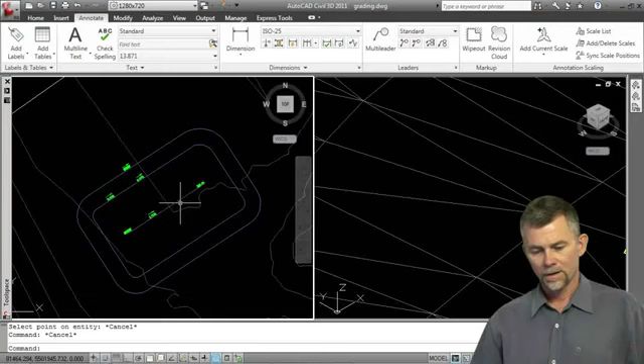We're now going to move into an example where we create grading objects for a pond, and we'll create the pond interior, the pond berm, and the pond daylighting. So if we come back to here, I'm going to actually start from scratch. I want to start with something clean here so we can work with.

Let's create a rectangle first, and I'll turn my ortho off. We'll create that rectangle. Let's say that's a little too big. Let's just create it about that big. Let's rotate it around the middle here, and there's my pond bottom. And what we're going to do now is convert that into a feature line.

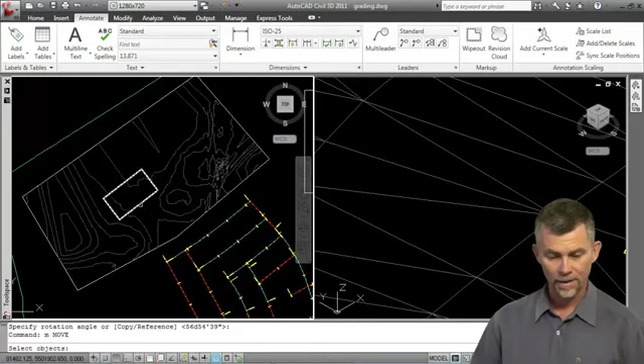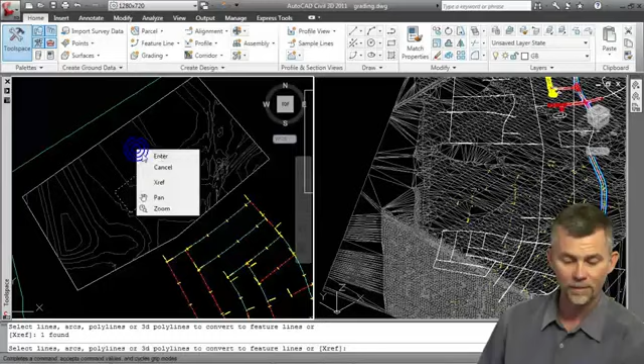So on the home tab of the ribbon, oops, I think I created a new drawing by accident, didn't mean to do that. On the home tab of the ribbon, we will create a feature line from that. So feature line, create feature line from objects. There's the pond bottom, and let's call this pond bottom. It's going into the pond site. I'll use the grading feature line style.

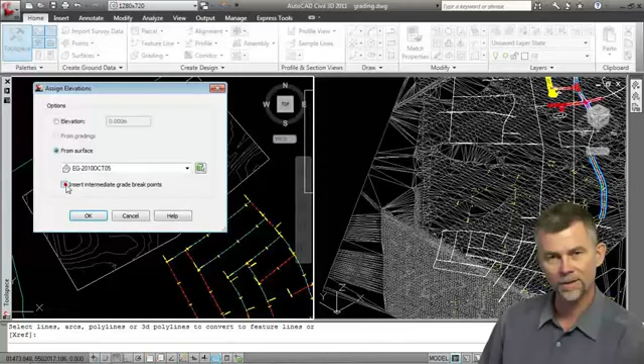We will erase existing entities, and I am going to assign elevations because I want to get an idea of the lay of the land underneath where my proposed pond is going to be located. And where are we getting the elevations from? The surface, and I am not going to add intermediate grade breakpoints because I just want the elevations at the vertices. And there's our pond bottom.

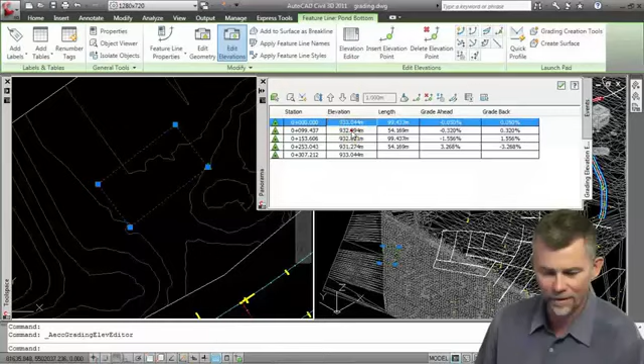So now let's edit those elevations to get something that's realistic here. So we'll use the elevation editor. Now I'm going to look at these and say, well, for each vertex I've got 933. Let's unselect it here. 932, 932, 931. Maybe I want my lowest elevation to be 929.5. So let's do that. Let's set this to 929.5.

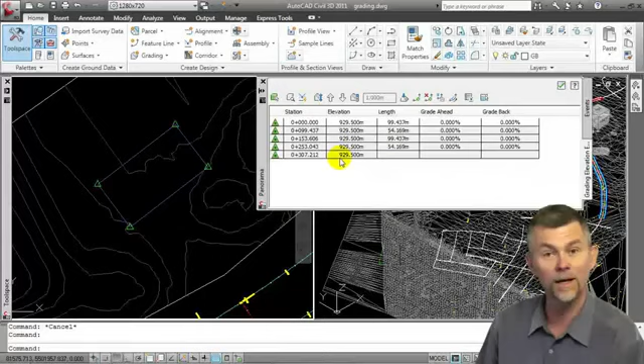Oh, I just did the first one, sorry. Let's pick them all and use this button here, and we'll go 929.5. Okay, so now we have, once again I'll use the flatten command, and now we have an elevation of 929.5. So that's the pond bottom. So before we grade the pond interior, let's do a little fillet on the corners.

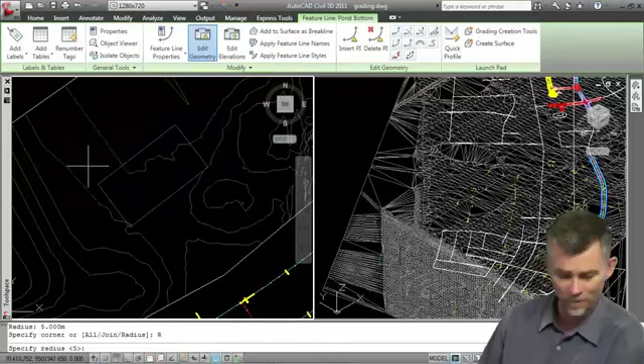I'm going to pick the pond, and we're going to turn off edit elevations. We're going to turn on edit geometry, and let's put some fillets, some small little radii on the curves. I'm going to set the radius value to 2, and we can either do each individual corner, or I'm going to right click and choose all, and there are now the 4 radii on the corners.

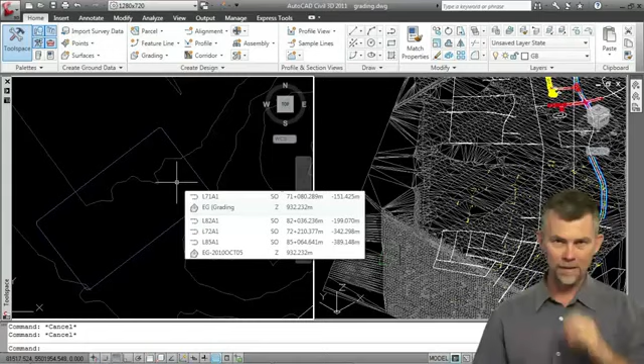And now we're almost ready to create the top of the berm, but what I'd like to do is assume an outlet elevation and assume a certain slope. Okay, so I want to assume a certain slope. So lots of different ways to do this, but what I want to do is use my elevation editor, my edit elevation command here, and I'm going to hold these elevations, and I'm going to set the low side down here.

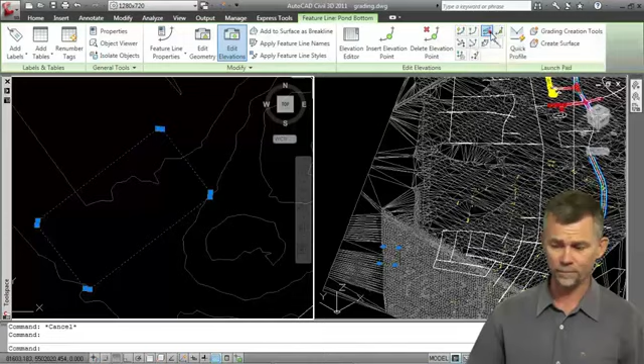So we'll use the set grade or slope between points command, and the start point is going to be here, and there's the elevation, and the end point is going to be here, and I'm going to go with a G for grade of -5%. So I want to push the flow to that direction, and we'll do it again. Start here, end here, and a G for grade of -5%.

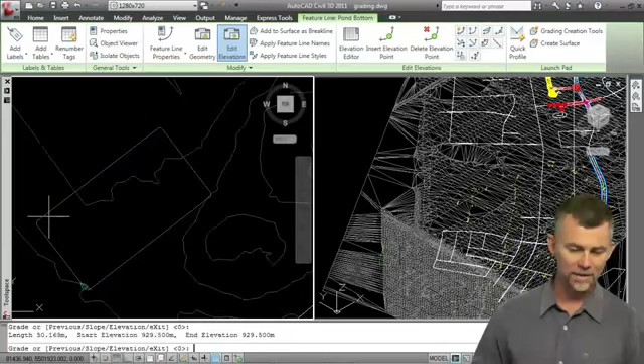So now if I were to use the edit elevations command, and we went to G for grade, you can see here that's 5%. That's 0 around there, 0, 0, -5% down. We could even add some labels. Why don't we do that?

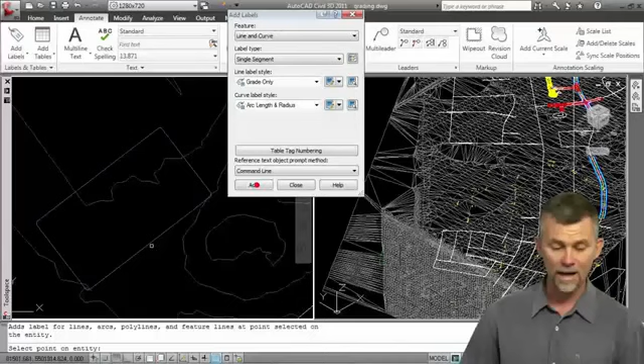Annotate tab, add labels, line and curve, add line and curve labels, and we're going to choose, what do we have? Grade only, and let's add a label to here and a label to there. Okay.